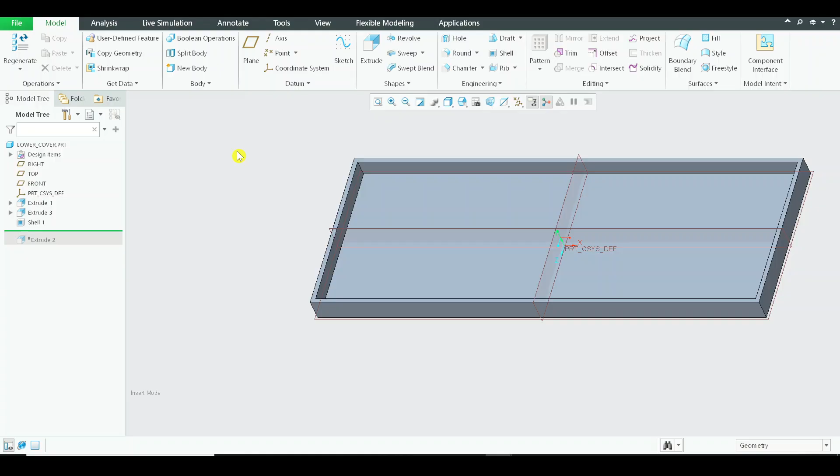Let us continue the discussion. In the previous video, we divided the upper cover and lower cover, then shelled them with minimum thickness. Now we will go to the assembly and combine them on top of each other and see how they look.

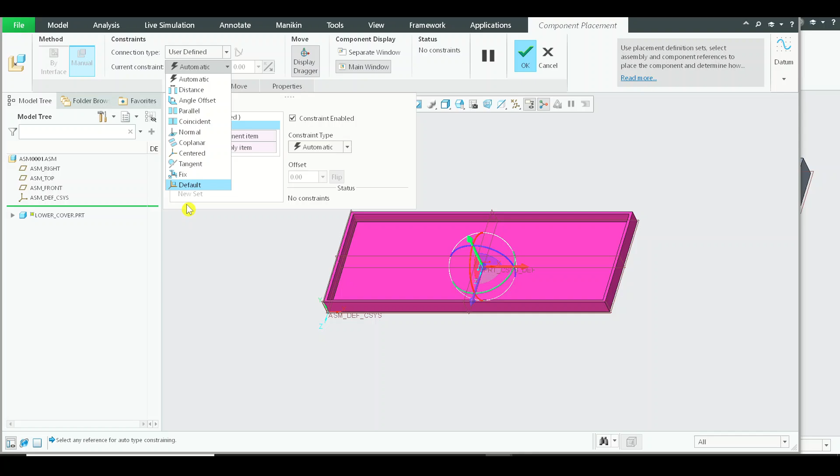So I will go to the assembly option, and the first step is importing the lower cover, keeping the connection or constraint as default. Then we will add the second assembly part, which is the upper cover.

Now there is a different module for assembly in my set of courses. You can check that one if you have certain doubts in assembly. So I have this upper cover and the lower cover added.

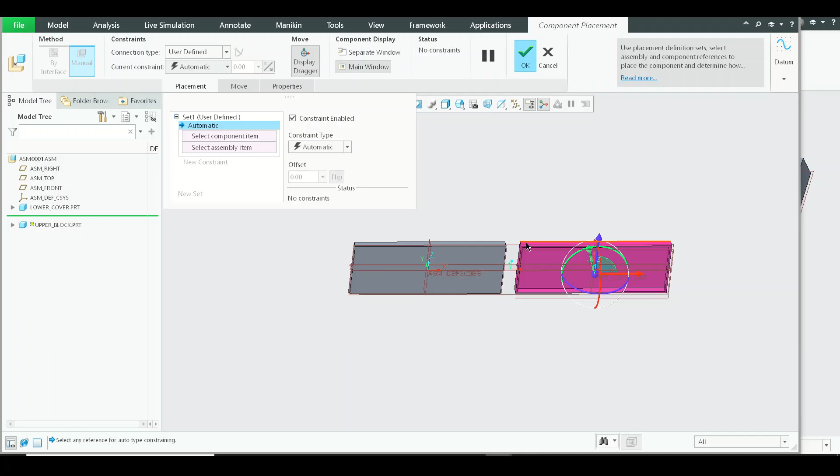Now technically, how do they assemble? They will be assembling one upon another, right? So what I'll do is utilize this surface and mate it with this surface so that they are coplanar, or upon each other.

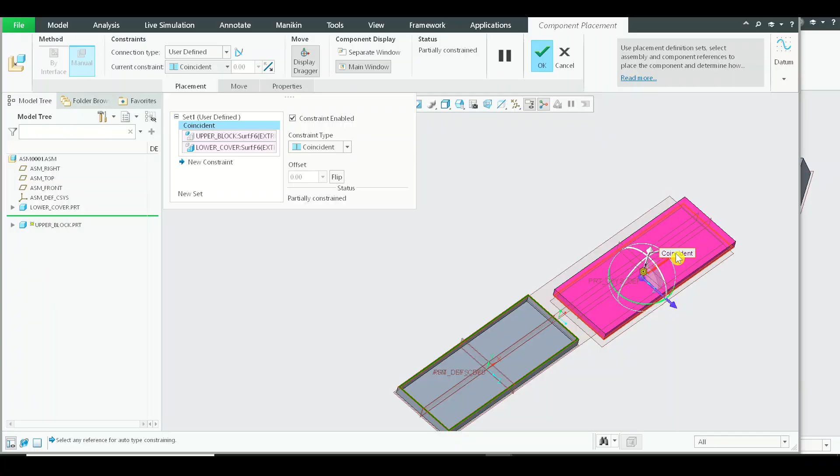Now you can see the upper axis has turned white, indicating that the object cannot be moved in that direction, whereas it can be moved in this direction and the other direction, as well as spun around this axis. So we have to restrict the degree of freedom.

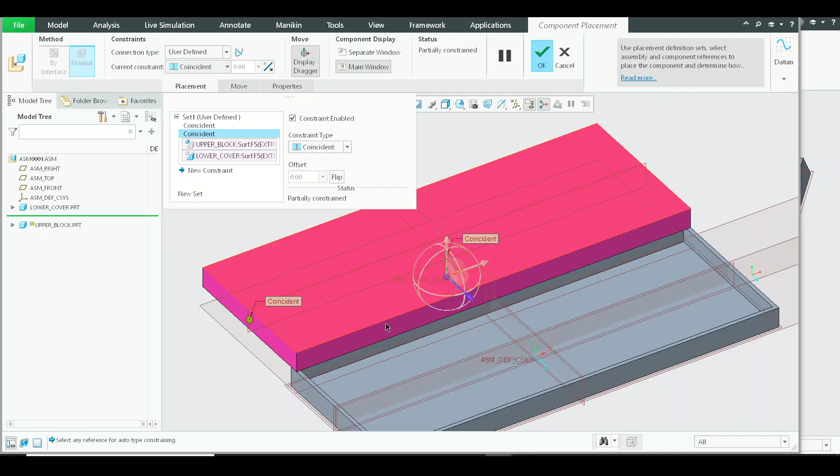The next option is to select this surface and match it with this surface, so they are coincident to each other, and the object cannot be moved in this direction. Now it's only moving in this direction, so I need to select this surface and make it coincident with this one. Now the object is completely constrained.

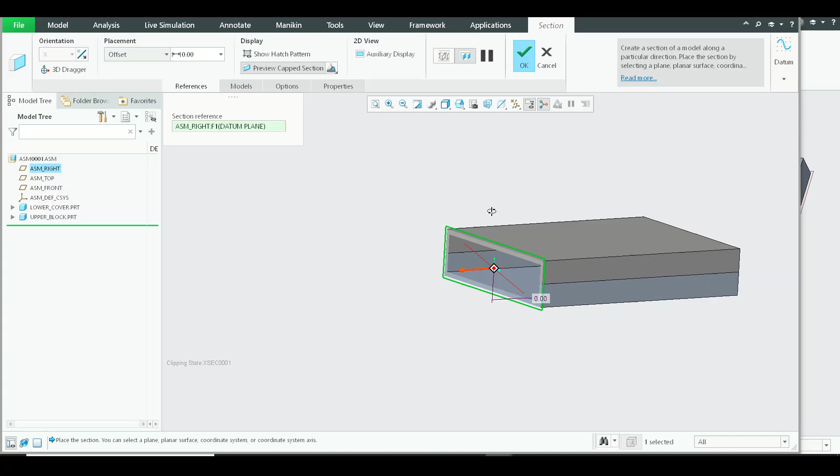Let me turn off the datum features and change the color of one of them. Alright, so the upper and lower covers are placed upon each other, and you can create a section view to see how they look.

But is this the end of the complete scenario? No. If we are just dividing them and assuming the job is done, that is a big no. You have to create certain features which will allow you to assemble them properly with the screws as well.

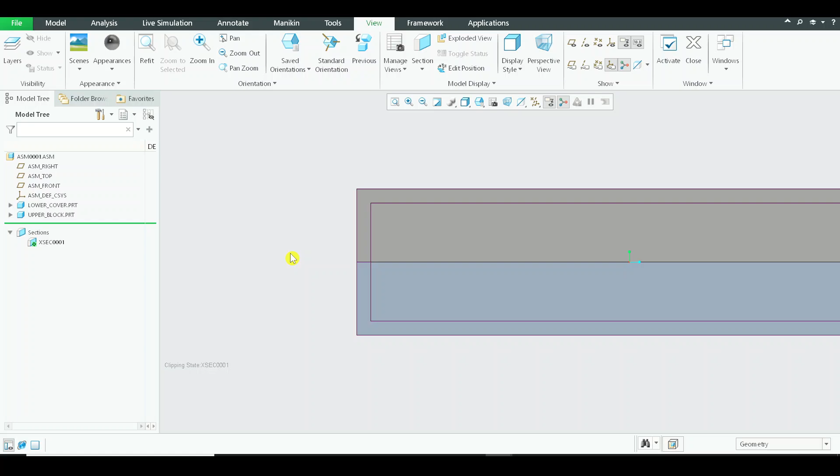Alright, now before assembling with screws, I will do one thing. You can see these are two parts which are placed upon each other. I'll just open a snip feature on my laptop.

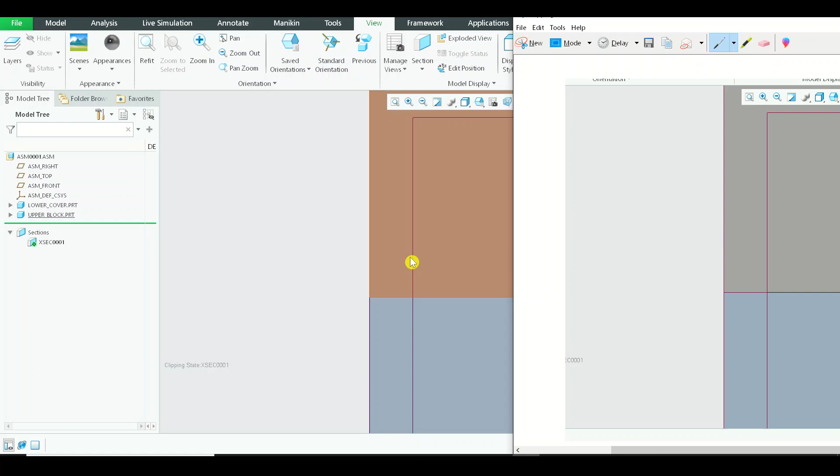Capture this so I can draw something over here. So we have this upper cover and the lower cover placed upon each other. Now I want to create some protrusions on both sides, so that kind of edges are created, and it will help guide them during the assembly process.

So what I'll do is take a pen, black color, and for the upper cover I will be adding certain material in this way around the perimeter of the lower cover, whereas for the lower cover I will be removing the material.

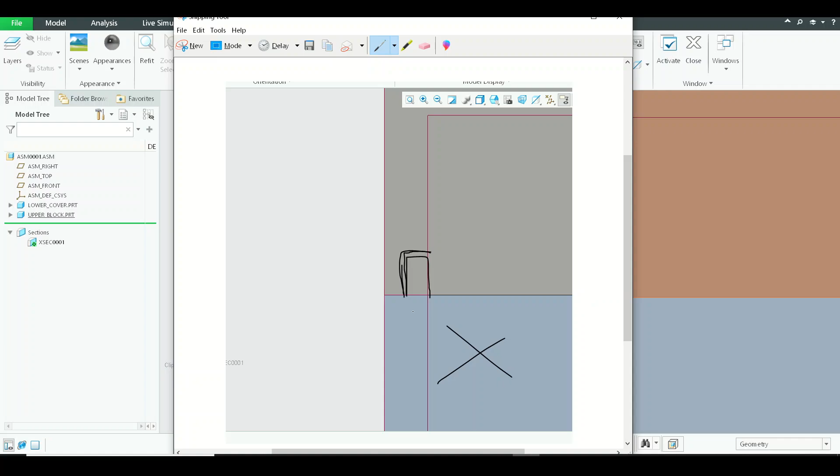Alright, my drawing is a little untidy, but try to understand. For the upper cover I will be adding the material, whereas for the lower cover I'll be removing the material along the perimeter. So those will be kind of guide veins for us to understand that this part has to join this one and go inside it.

Alright, so we will be doing this for both of the parts in the next video. Let us just move to the next video and work on it.